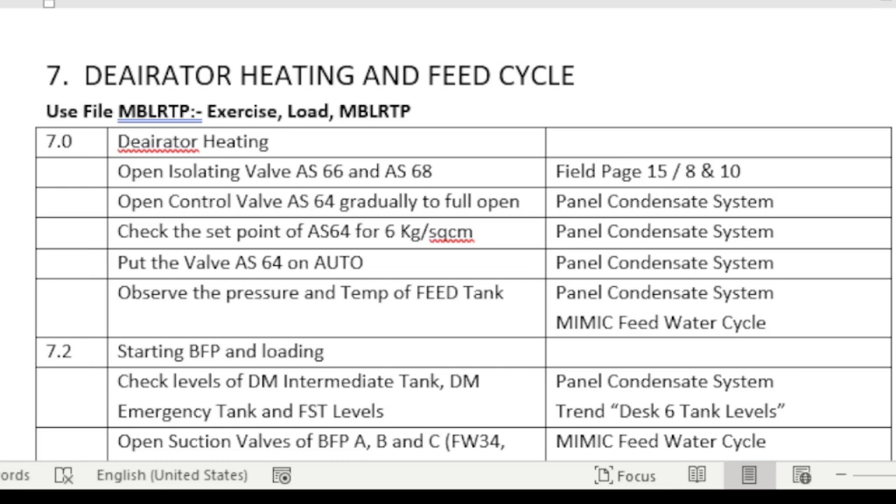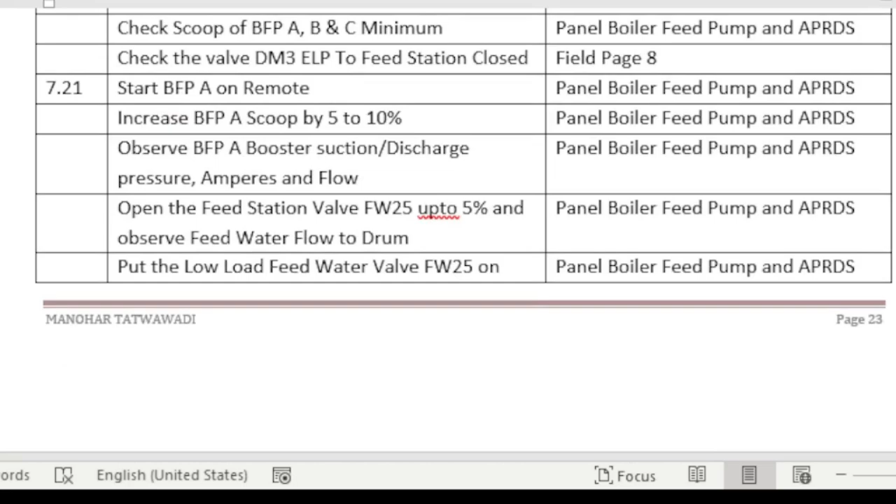Then in this session we will start the BFP and load the BFP. We will start the BFP and load it. So we check up whether the BFPs are on.

Check the levels of DM intermediate tank, DM tank, emergency tank and FST levels. Now you can see these either on the panel condensate system panel, or on the trends - six tanks level in the trends. You can see there also.

Now open the suction valves of BFP A, B and C. BFP A, B and C suction valves can be opened from the Mimic, feed water cycle.

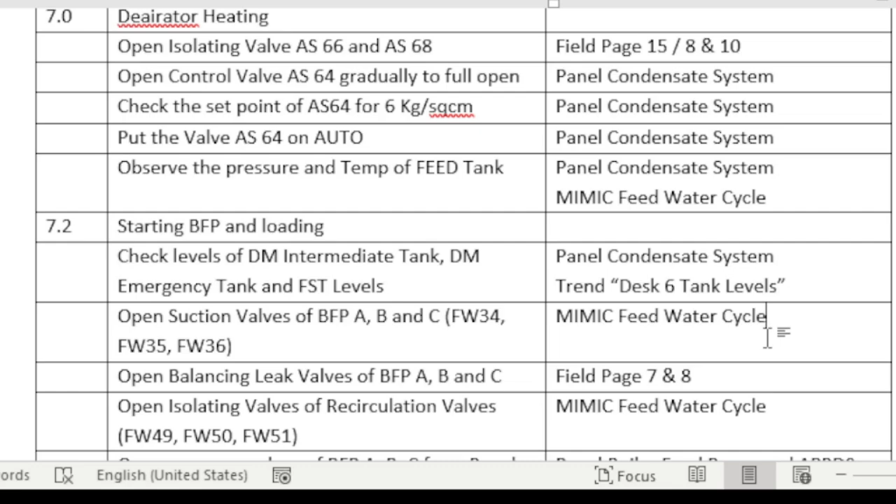Then open the balancing leak-off valves of BFP A, B and C. That is from field page number 7, index number 3 and index number 10, and field page number 8, index number 3.

So you can open the warm-up valves, then open the feed HP heaters feed bypass valve FW24. You can open this from the Mimic feed water cycle. Go to Mimic and open it.

Then select the LRP of auxiliary oil pumps of BFP A, B and C, and also select the LRP of BFP A, B and C on remote. Now these are already made on remote, but you can check it on the IMF instructor malfunction page number 8. There you can find out, but these are already selected on remote.

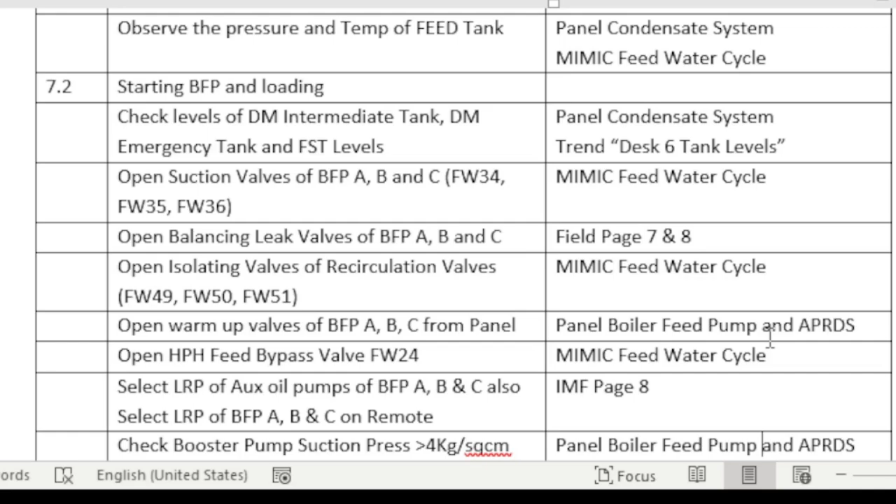Now check the booster pump suction pressure is greater than 4 kg per square centimeter from the boiler feed pump and APRDS panel. Now check one pump, two pump selection on one pump, that is panel feed pump, also on the same panel.

Then standby pump selection on manual. The standby pump should be on manual. So whether it is B or C, if you want to start A pump, then you have to see that the B pump is ready and the selection is on manual.

Now drum level selection - drum level selection high, normal and low - that is on normal, and 1 element and 3 element selection on 1E position.

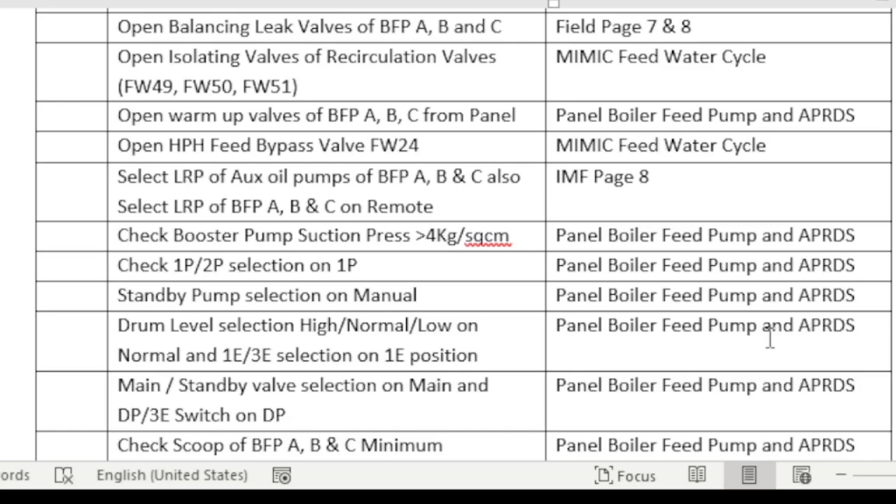Then check up the main standby valve selection on main, and difference DP selection and 3E selection switch on DP, then check the scoop of BFP A, B, C to be on minimum. That is also to be checked from boiler feed pump and APRDS.

The next step is to start the BFP A on remote. Now when you start the BFP A, inform the other control rooms, because it's a 6.6 kV auxiliary and takes the highest starting current, so you have to inform them whether you are starting the BFP.

Now you start the BFP A, B and C from the panel BFP, boiler feed pump and APRDS.

Then increase the BFP scoop by 5 to 10%. It is minimum at 25 or 30, so increase it by 5% or 10%, and check up the flow. That is also on the panel boiler feed pump and APRDS.

Now observe the BFP A booster suction discharge pressure, amperes and flow. Then open the feed station valve FW25 up to 5%, and observe the feed water flow to the boiler drum.

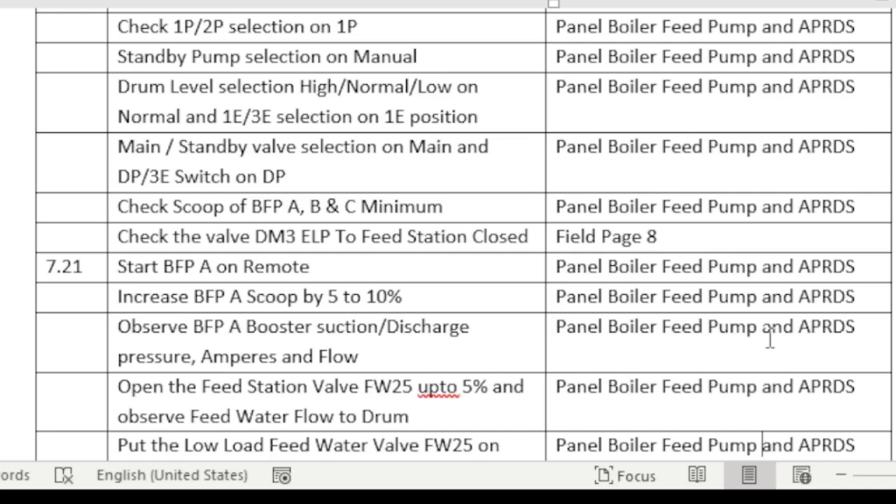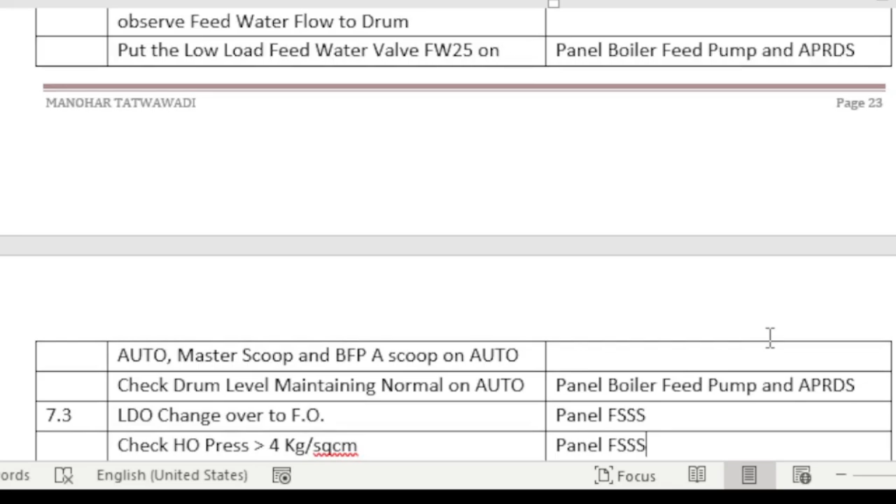Put the low load line feed water valve FW25 on auto, master scoop also on auto, and BFPA scoop also on auto. Now check the drum level is maintaining normal on auto, from boiler feed pump and APRDS.

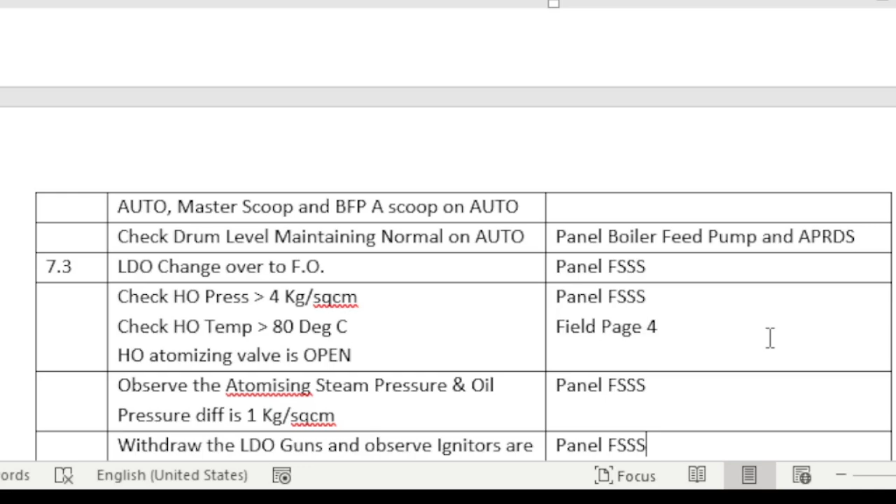Next, in the FSSS panel, we want to change LDO to FO. Go to the FSSS panel, check the feed water pressure, heavy oil pressure more than 4 kg per square centimeter. Check the heavy oil temperature more than 80 degrees centigrade, and heavy oil atomizing valve open. Observe the atomizing steam pressure and oil pressure differential to be 1 kg per square centimeter.

Withdraw the LDO guns and observe that the igniters are in service. Then change over the selection of the warm-up valve to heavy oil and give command to pair AB1 and AB3 guns from the FSSS panel.

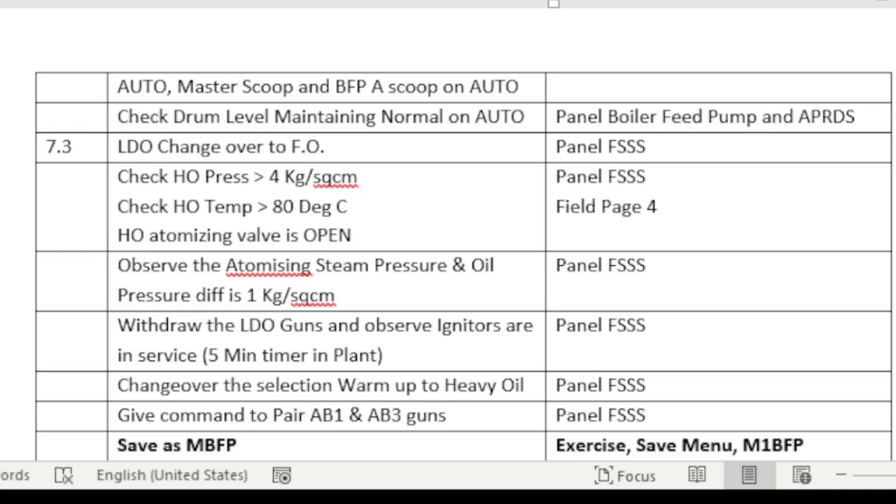Now save the file as MBFP. To save this file, go to exercise, save menu, and number M1BFP. With this we start our simulator session.

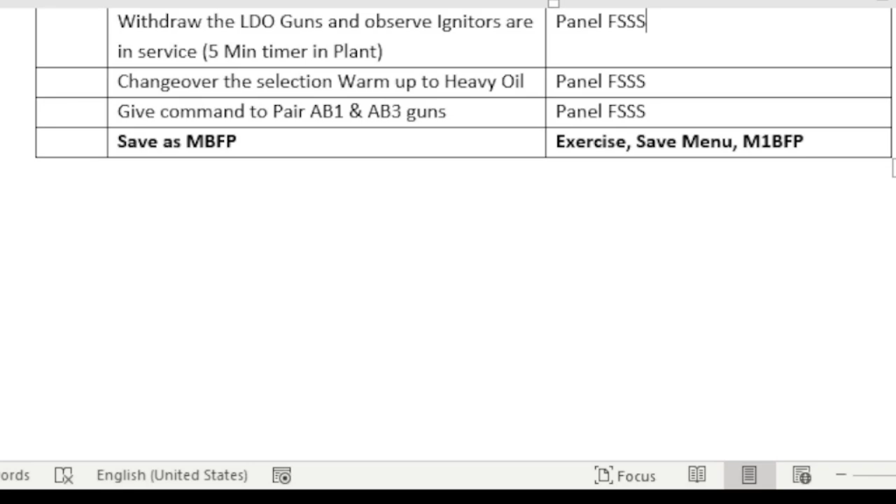This is the sequence of operations after the boiler light up. First of all, we will open the simulator. For that purpose, we will open the server first and then open the actual simulator. Now here we have to load the exercise file.

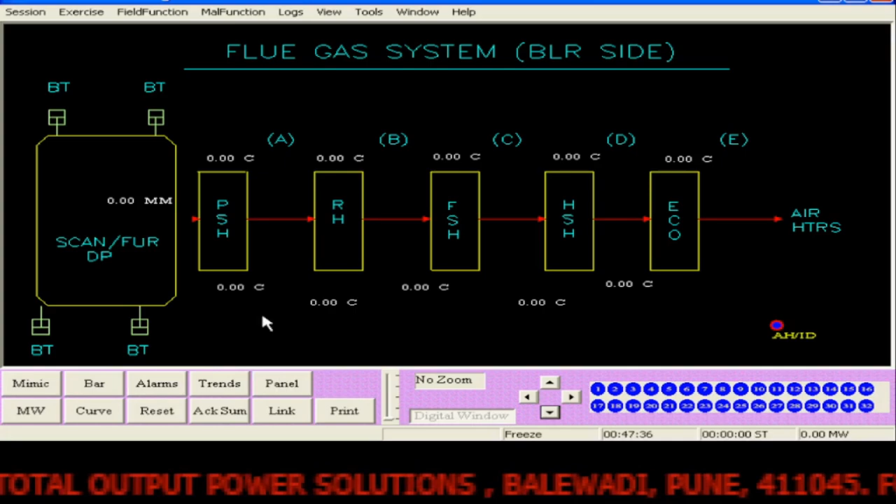We load the file that we have saved with the name MBLRLTP, and now we have opened the file.

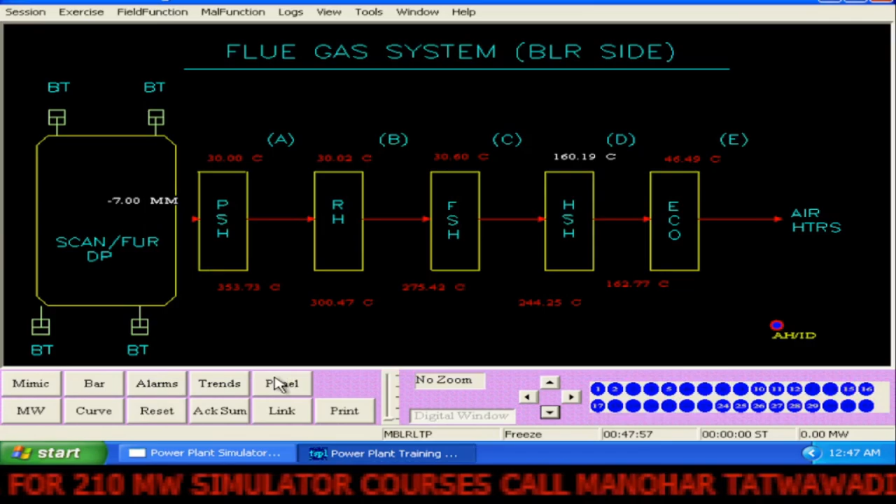Then we have to start with the deaerator heating. We first go to the panel, then we acknowledge, reset, then we proceed for deaerator heating.

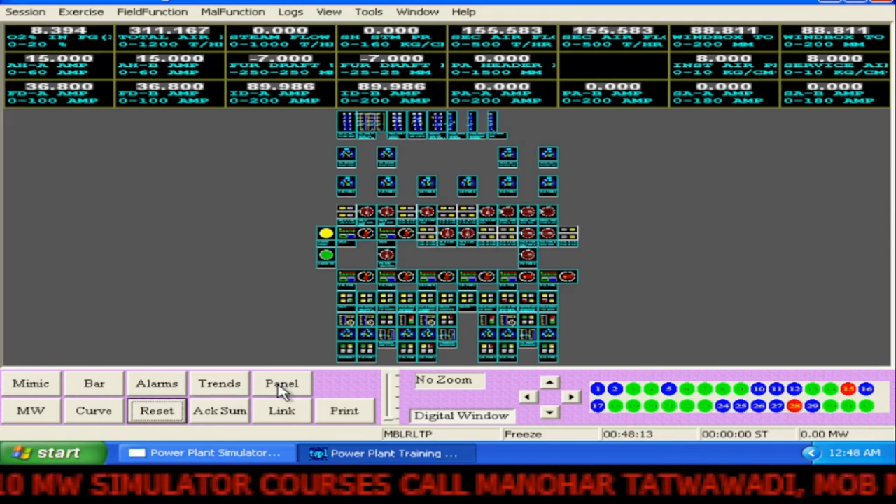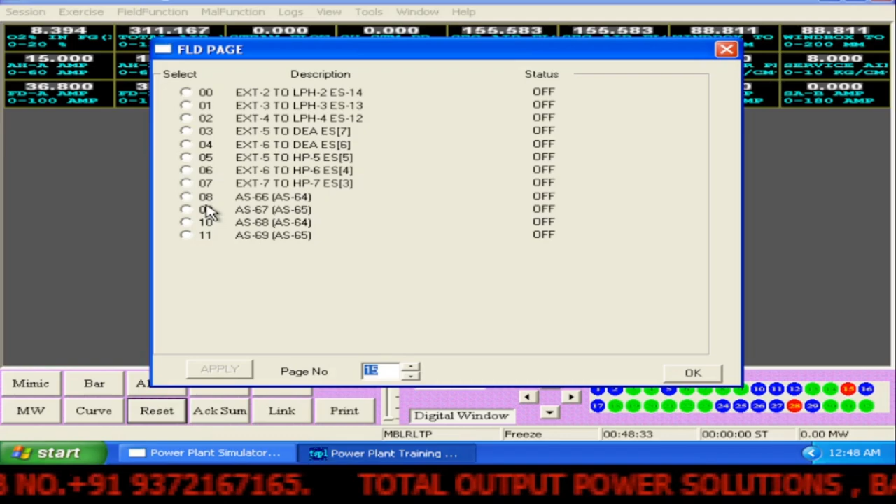Open the isolating valves AS66 and AS68, which are on field page number 15. Go to field page number 15 and there open valves 66 and 68. So this is 66, open, and this 68 valve, you have to open.

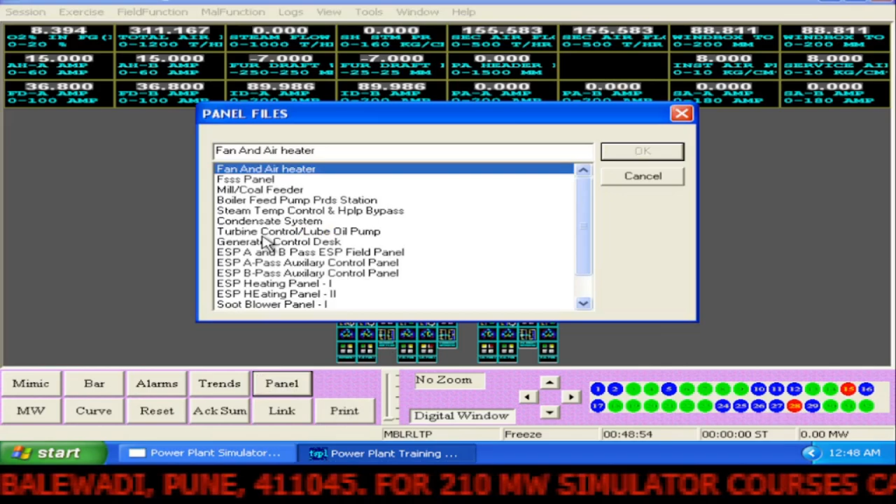Then this valve is open. Then you have to go to control valve AS64 from the panel. We go to the panel, turbine control and condensate system panel. We go to the condensate system panel and from there we open it.

Before doing all these operations you have to run the session. So the session must be in running mode and then you have to operate the valves.

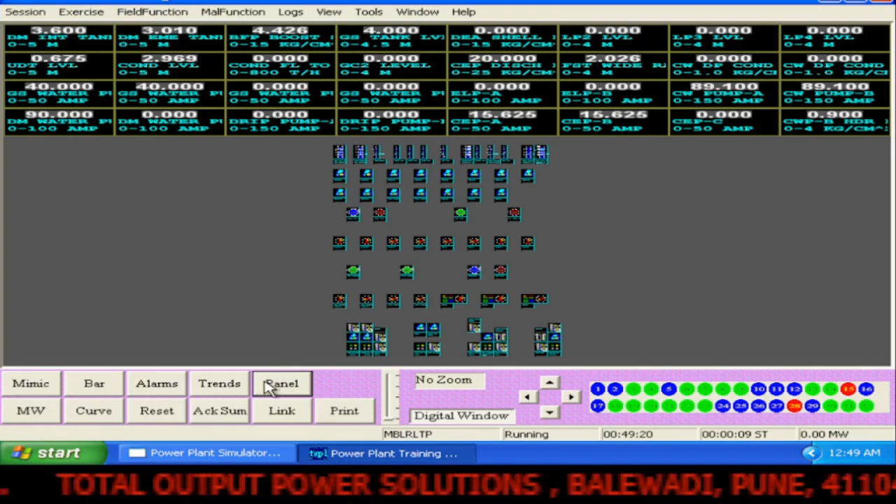Now you have to open the control valve AS64. We go to the condensate panel. There we see where is the AS64 valve. This is the AS64 valve. This is CV6, CV7, and here main condensate.

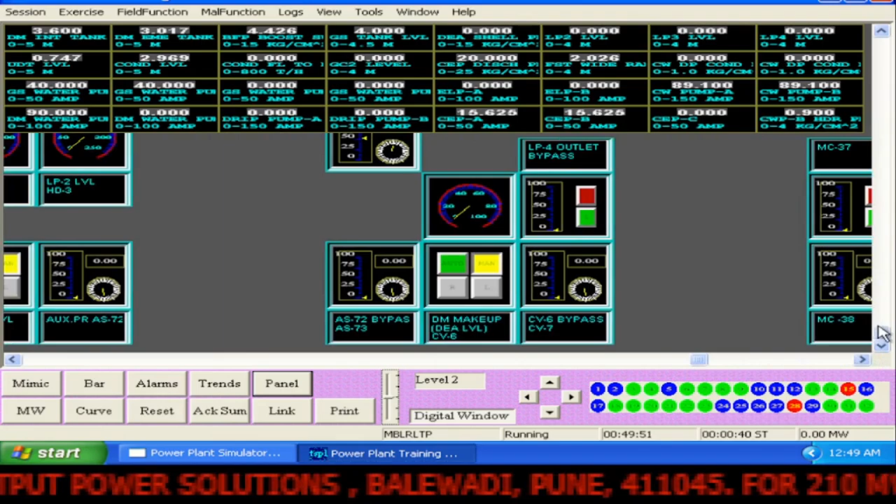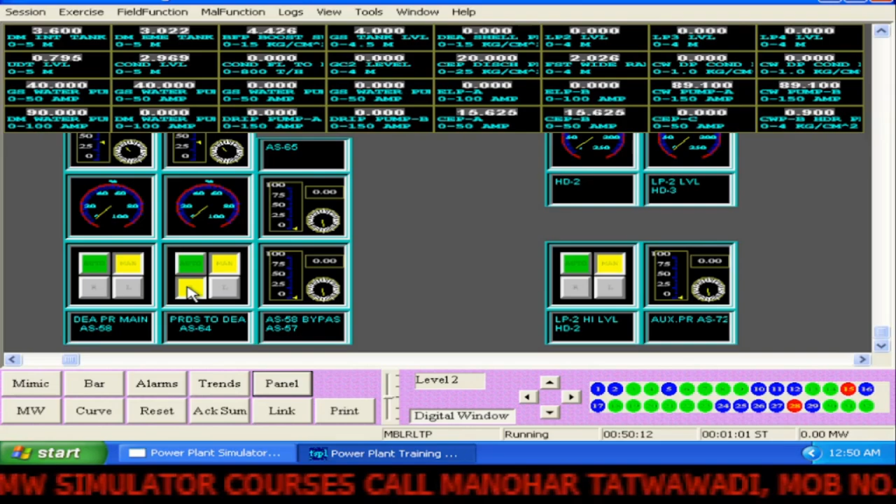Here I think you can see the valve. This is the AS64 valve, and you have to open the AS64 valve gradually. You have to open this valve gradually so that, and open this valve fully.

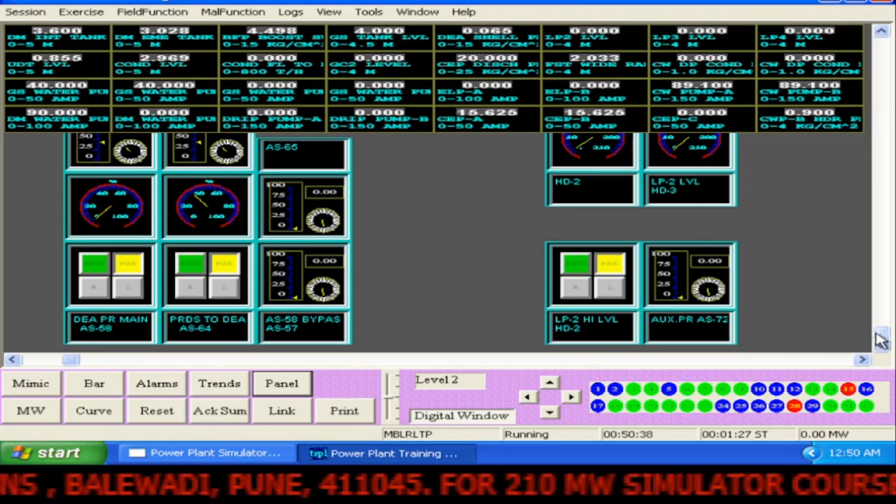So when you open this valve fully, you will see that you have to open this valve fully. Like you open this valve, set the pressure control to 6 kg. If you set this to 6 kg and put this valve on auto, it will open fully. So place this valve on auto so that it opens fully.

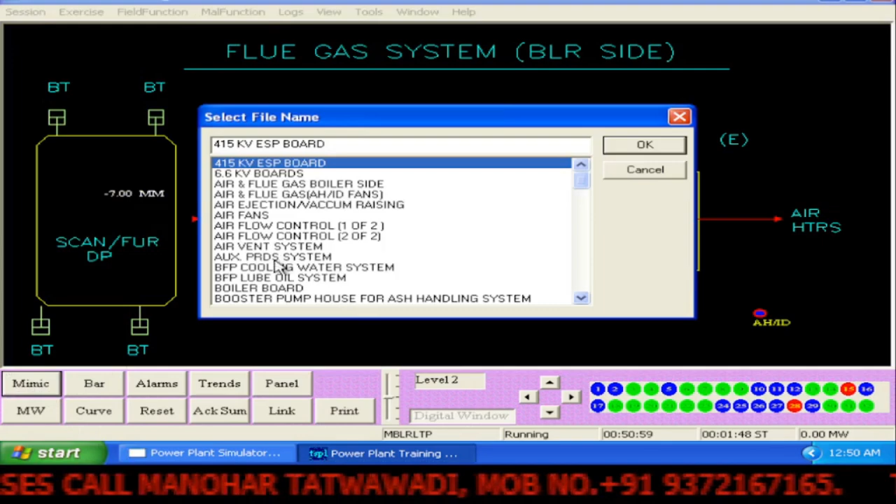Then observe the pressure and temperature of the feed tank. You can observe it here, or you can go to the feed water system, and there you can see the deaerator pressure and the deaerator temperature. You can see this temperature is rising, right?

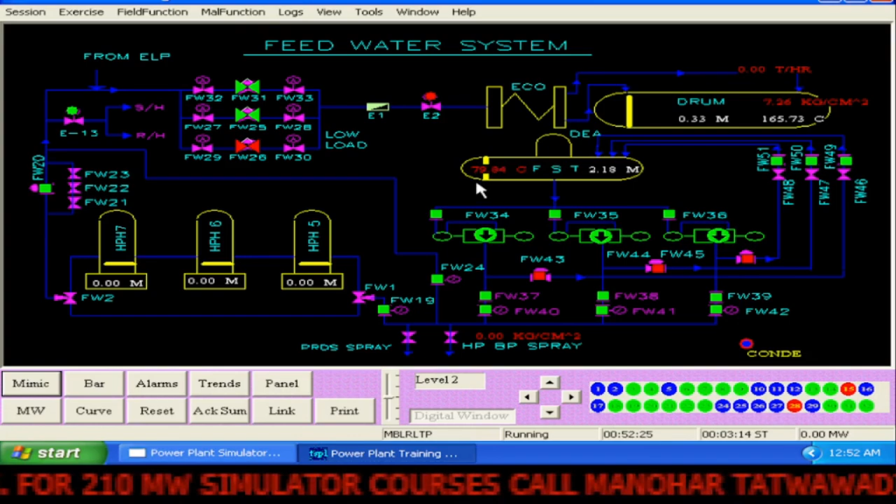So here we pause. Now we see that the temperature has risen to around 80.

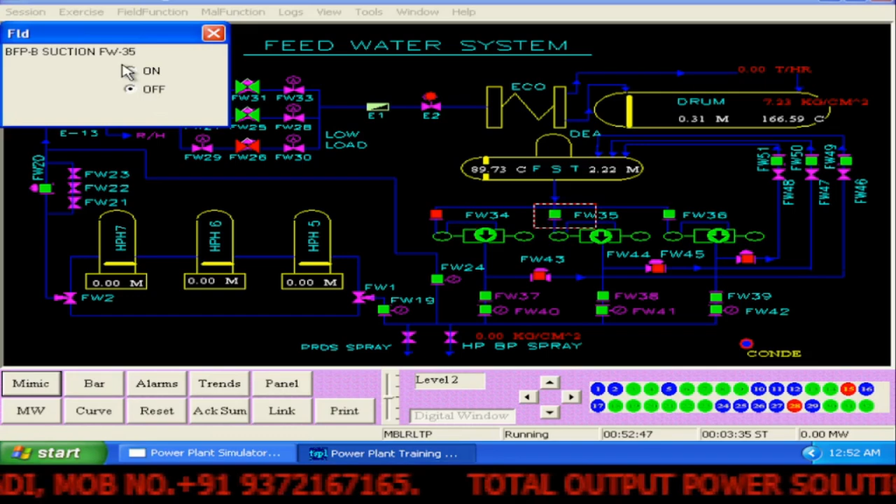Now we start, for starting the BFP, open the suction valves of A, B, C, which are on the mimic. On this mimic, the suction valves of all these pumps you have to open: FW 34, 35 and 36.

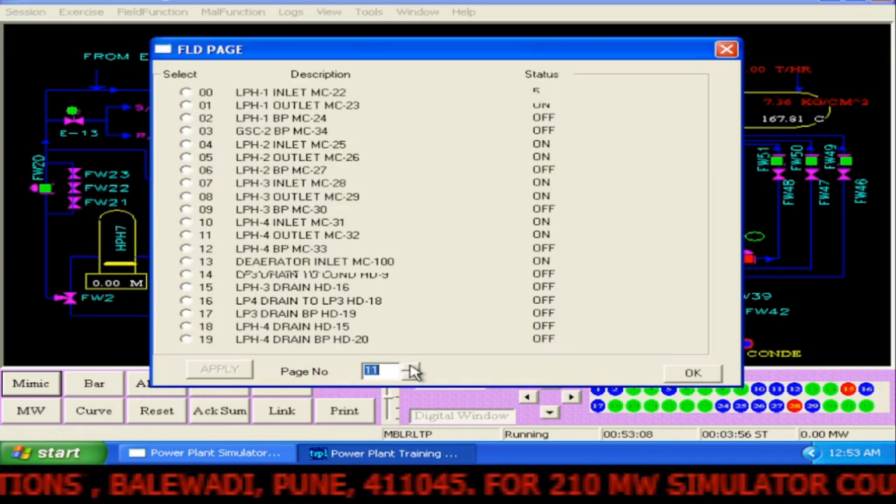When you open these valves, after that go to the field and open the balancing leak-off valve. You have to go to field page 7, and here is the balancing leak-off valve.

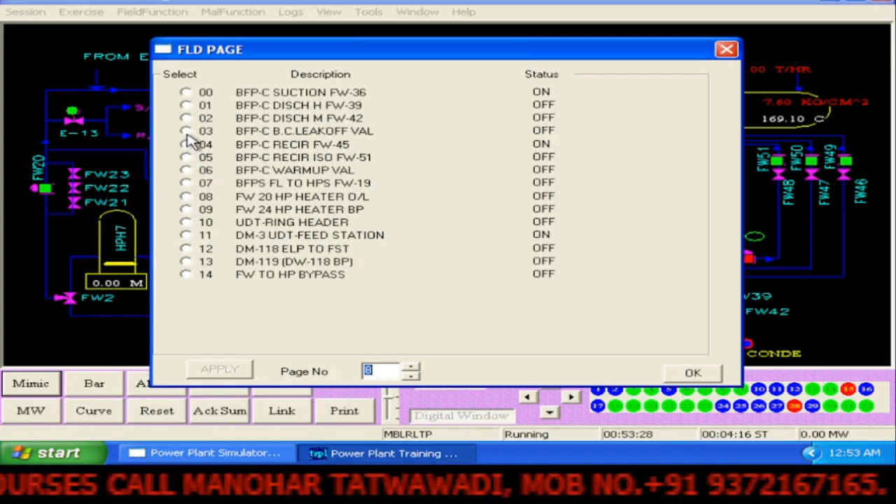BFP A balancing leak-off valve on, similarly BFP B balancing leak-off valve on, and similarly on page 8 you will see balancing leak-off C valve that you have to open. Then open the isolating valves of the recirculation valves.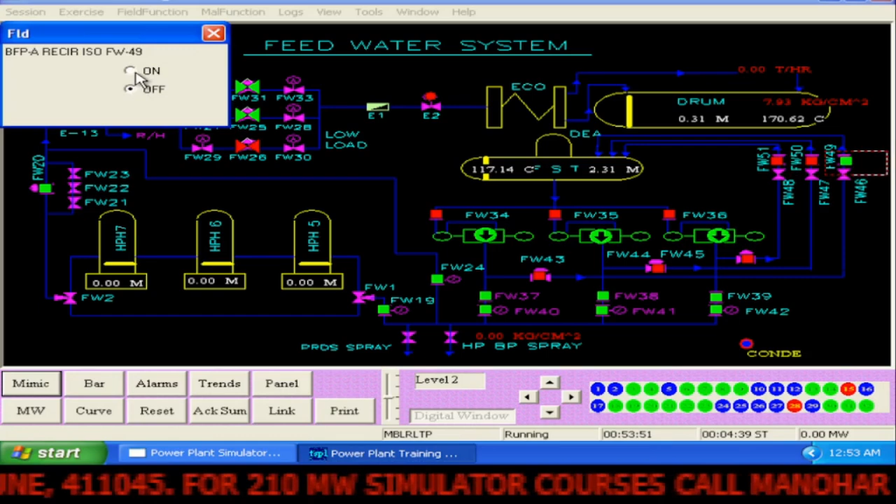These are the recirculation valves and these are the isolating valves. Open these isolating valves from the mimic, for A, B and C. Then open the warm-up valves now from the panel.

We go to the panel: condensate system, boiler feed pump and PRDS station. Here you have the valves here.

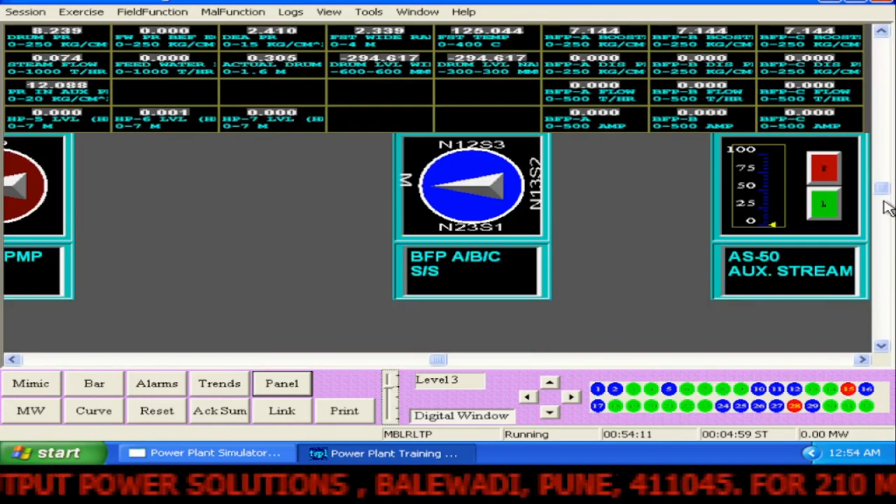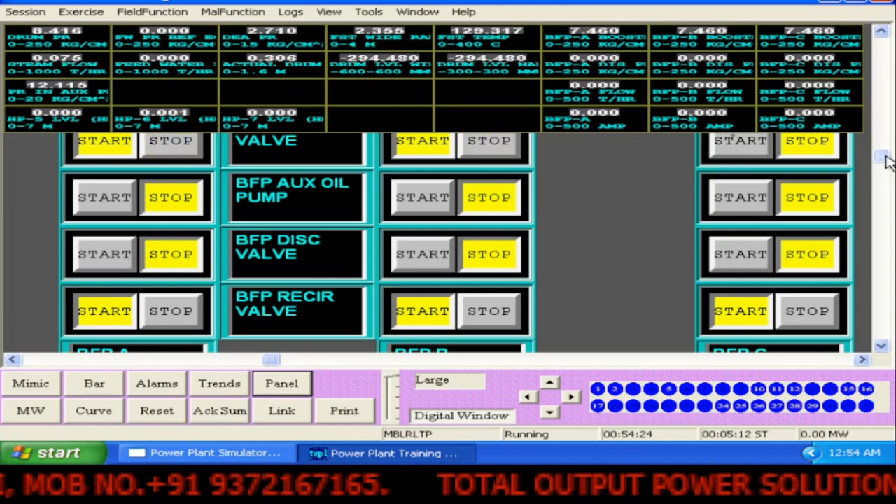Yes, BFP ABC, and here you can go to the BFP, this is BFP C. You can go to BFP ABC. So warm-up valve, this is recirculation valve, this is the warm-up valve. So you open this warm-up valve here, you open this warm-up valve here, and open this warm-up valve here. This is warm-up valve, you can see BFP warm-up valve.

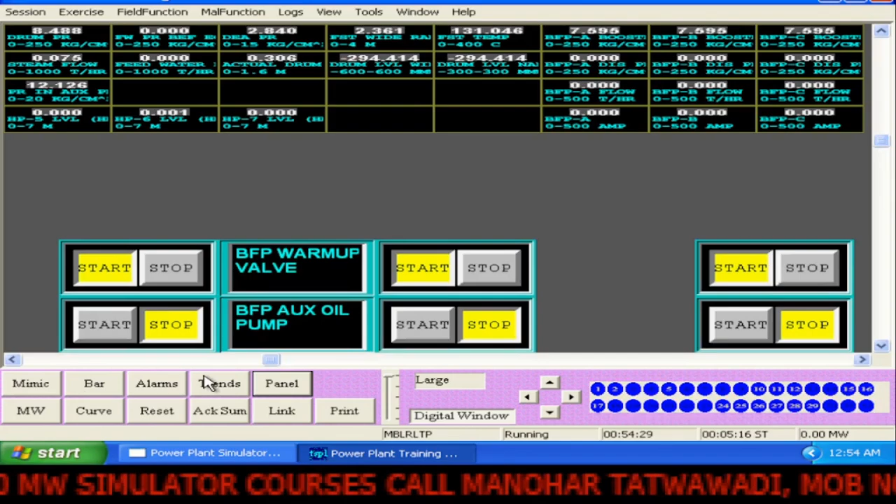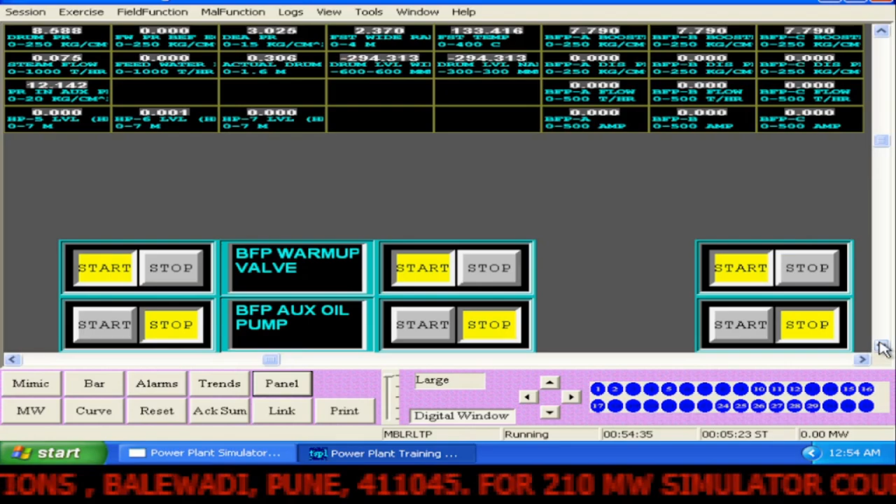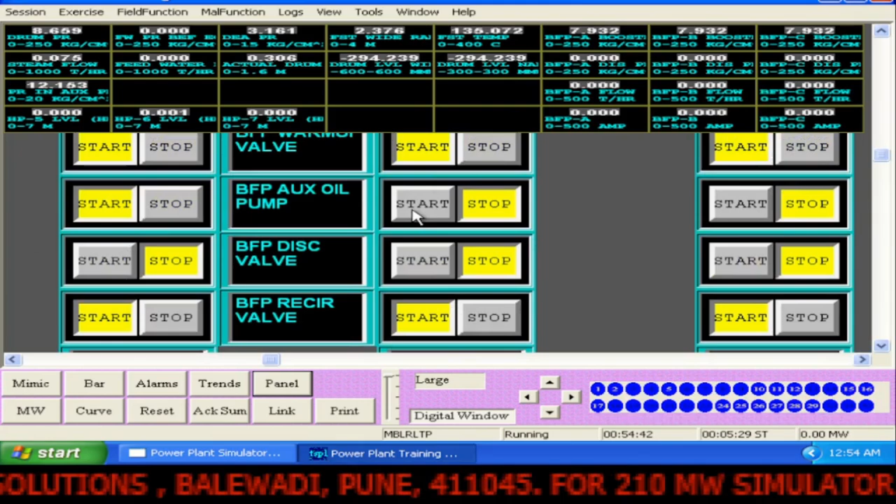So ABC. Then we go to, we check up the LRPs. Those are on remote, and check the booster pump suction pressure, that is 4, that you must check. Then you can start the auxiliary oil pumps here. From here you can start the auxiliary oil pumps. You start the auxiliary oil pump, and you can start this auxiliary oil pump.

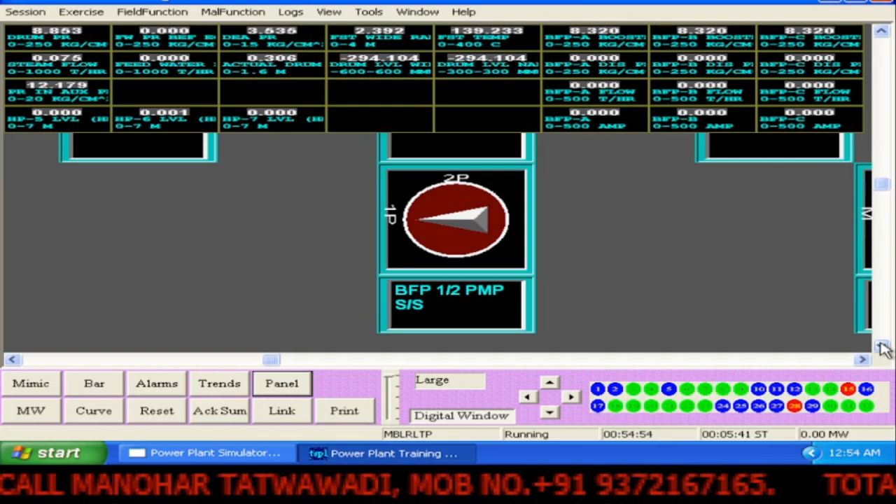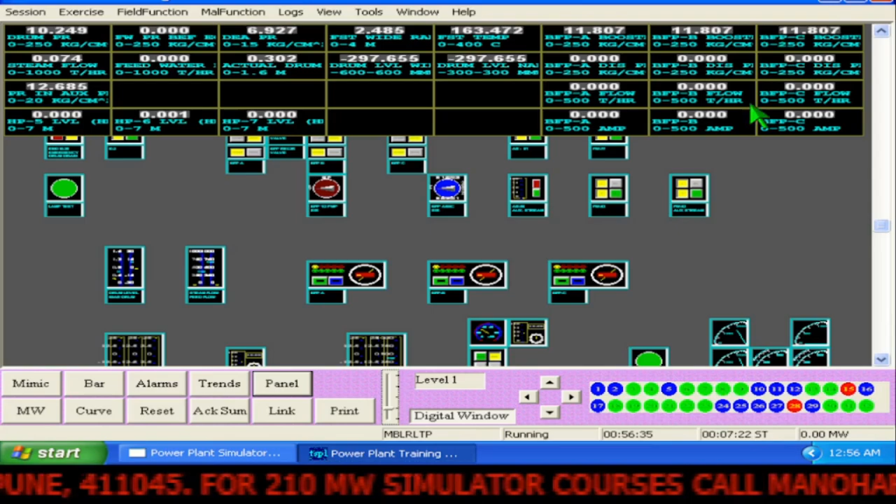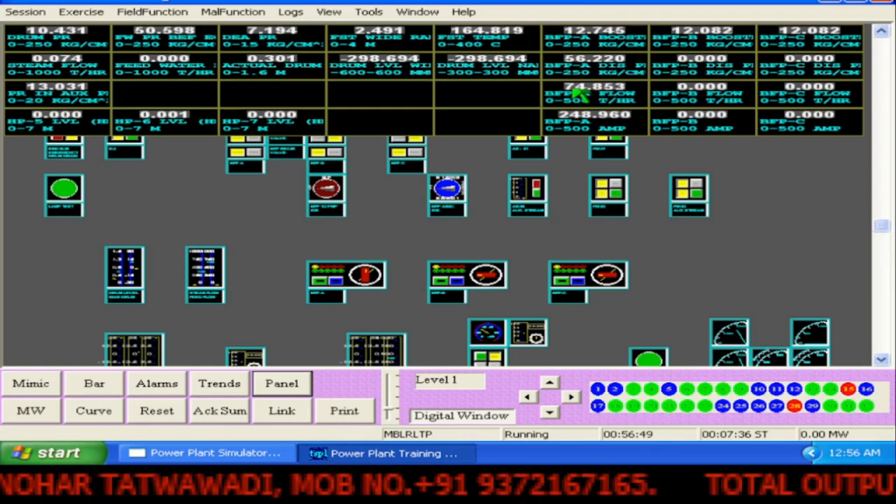So here is, I think, 3 BFPs. You can see here the 3 BFPs, the controls. You can see here the pre-check also available. So you can start the first BFP. Now when you start the first BFP, you can reset the things. You will see the amperes there, BFP A, and the BFP A flow is also there, BFP A, and the scoop control is on minimum.

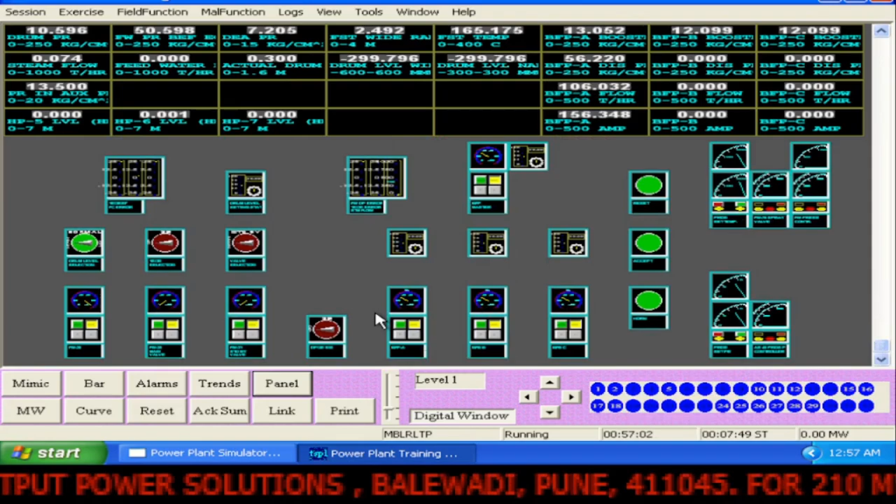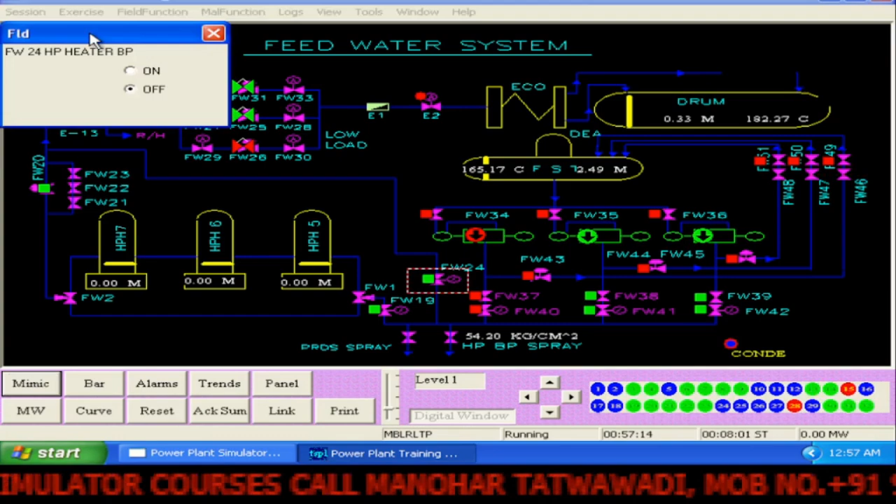So the scoop control we will check up, it is on minimum. We will just raise this scoop control. Now we go to the mimic and open the valves for this FW24, we make this valve on, and now you will see that this valve is on. Then from here this E2 is also on, so some flow will be there, which is this 86, indicated here, 86.60 tons, and this much flow is there.

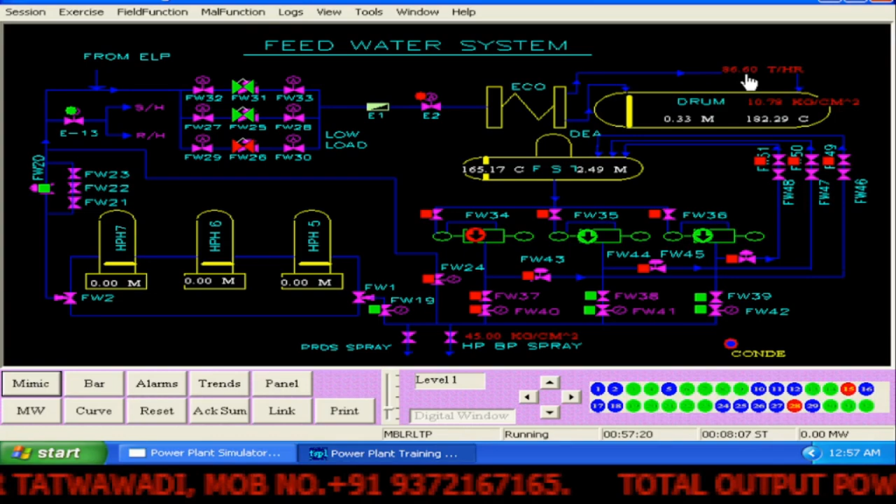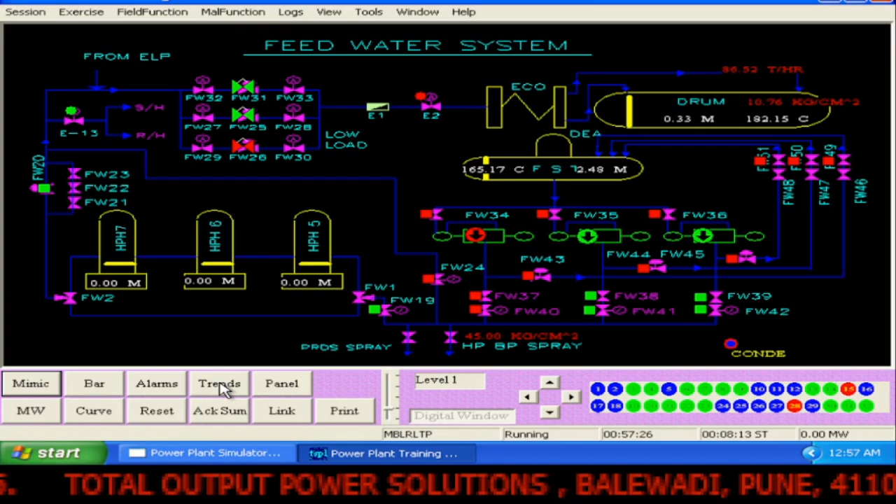So BFP is now started and it is delivering water to the boiler drum. The drum level we can check, it will be now increasing in the trends. You can go to trends and you can check up the drum level. You see it has started little bit increasing. So this drum level will now increase. We can again increase the feed water flow.

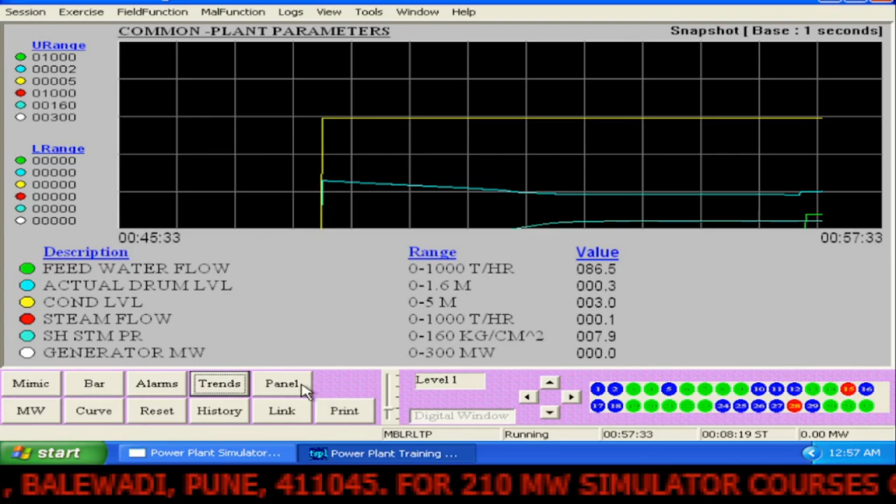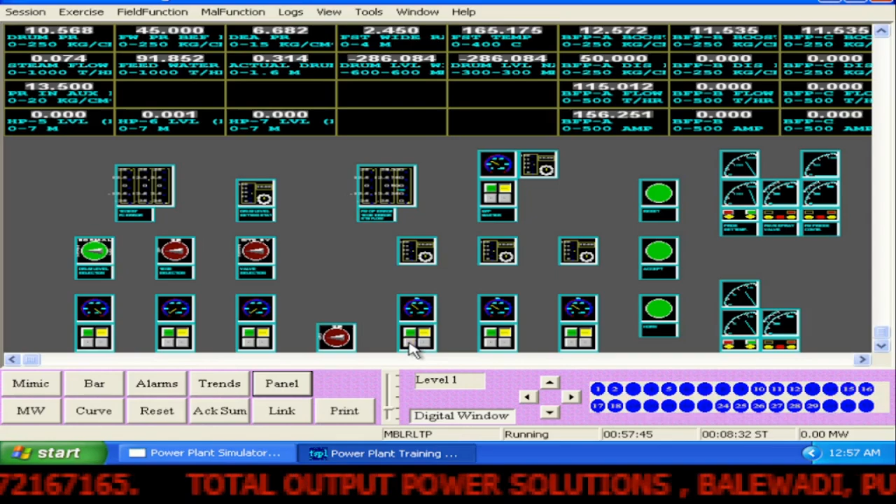So we go to the panel and from here we raise the BFP A, slightly we raise the flow. Here you can see the flow, feed water flow, it is 86.5 something tons. So we again slightly raise it. So you will see that it has increased. And well friends, now we have to change from LDO to HFO.

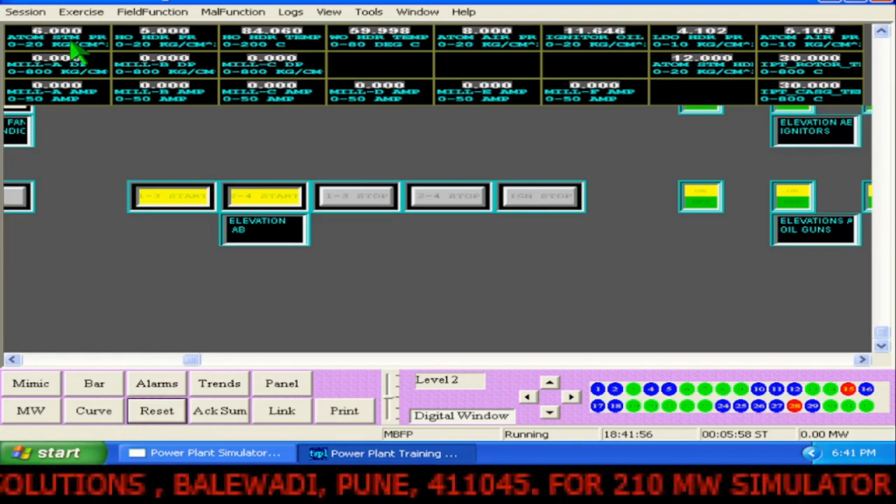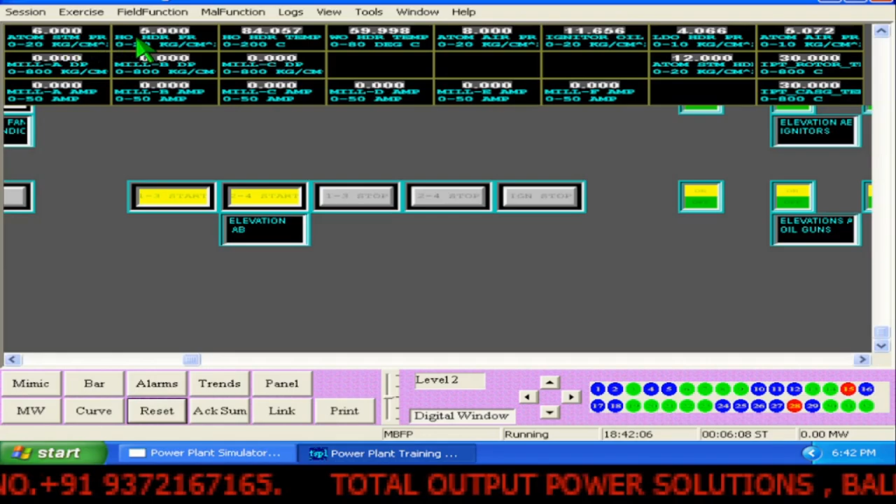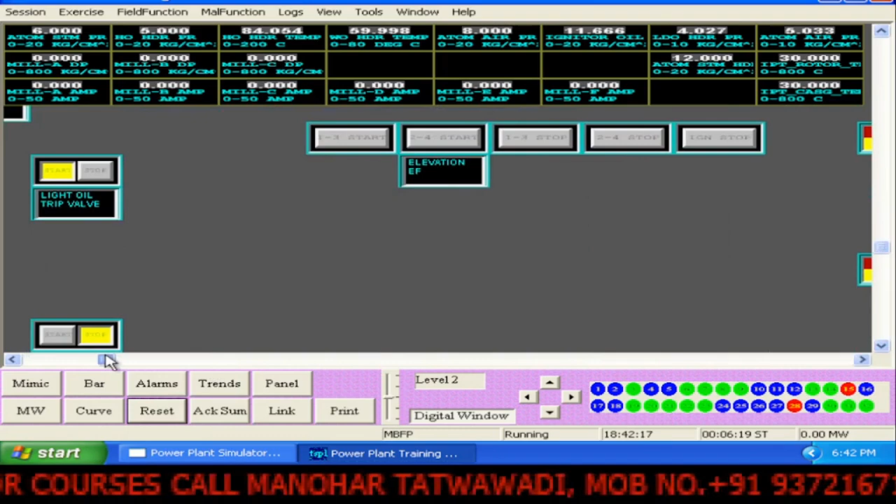So for this we check the HO pressure, this heavy oil header pressure, which is 5. Then check the temperature also, it is 84 degrees centigrade, more than 80, and atomizing valve is also open. Now the atomizing pressure difference, atomizing steam pressure, there is a difference of 1 kg. Then we will withdraw the LDO guns, but before that we need to open the HO heavy oil valve, heavy oil trip valve. Which is closed. You see this is the heavy oil trip valve.

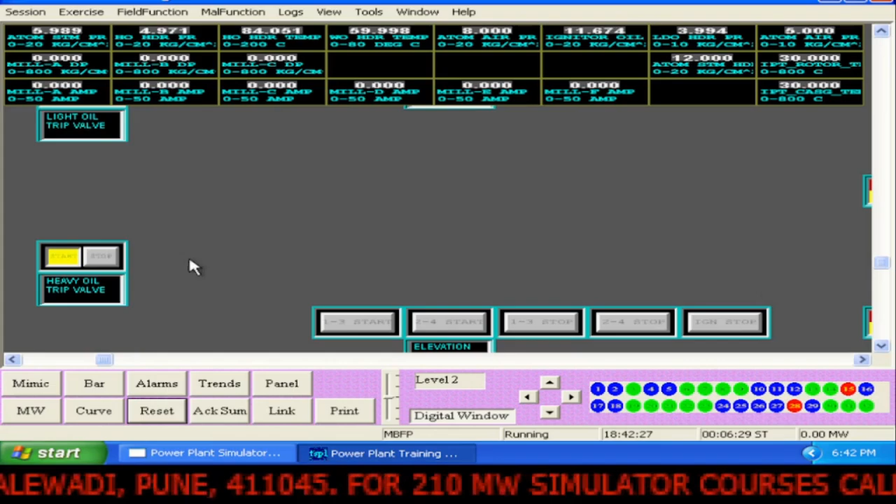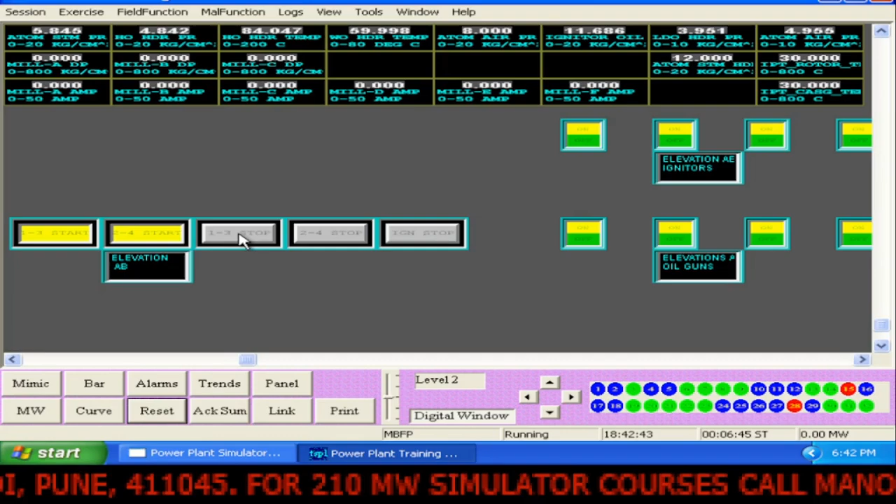We will open the heavy oil trip valve, and now once we open the heavy oil trip valve, we will stop the LDO guns. So these are the LDO guns, every elevation we have here. So we give stop command to LDO guns, pair 1-3 stop, and we see that the 1-3 has stopped. Similarly pair 2-4 also we will stop. So now there are no oil guns in AB.

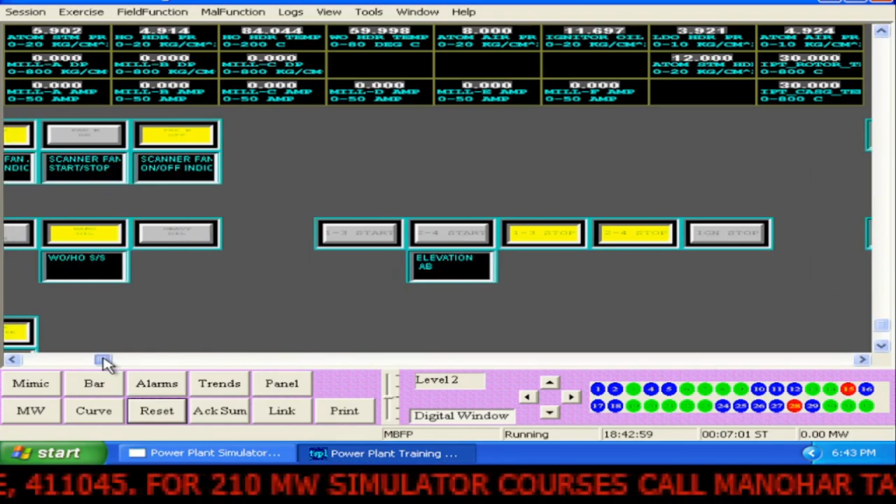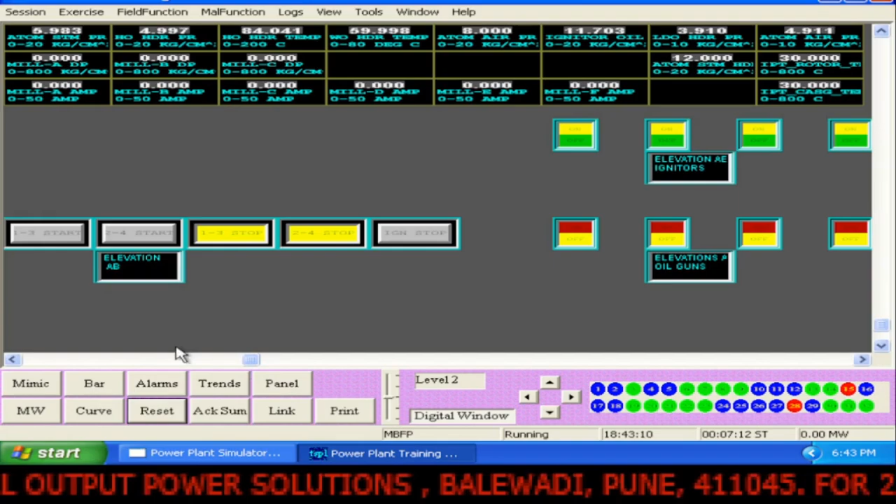Now we take the selection on heavy oil. So we make the selection on heavy oil, and then we give start command to pair 1-3, and you will see that pair 1-3 will be started with heavy oil. Similarly pair 2-4 also we give a start command.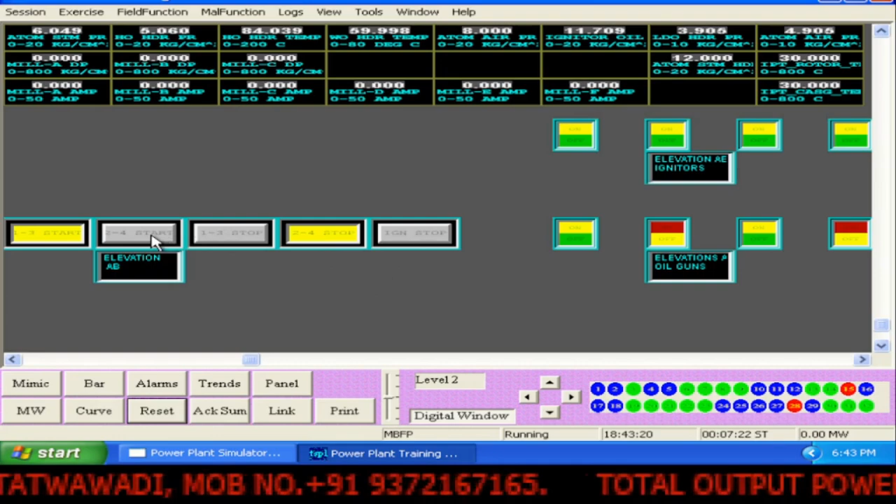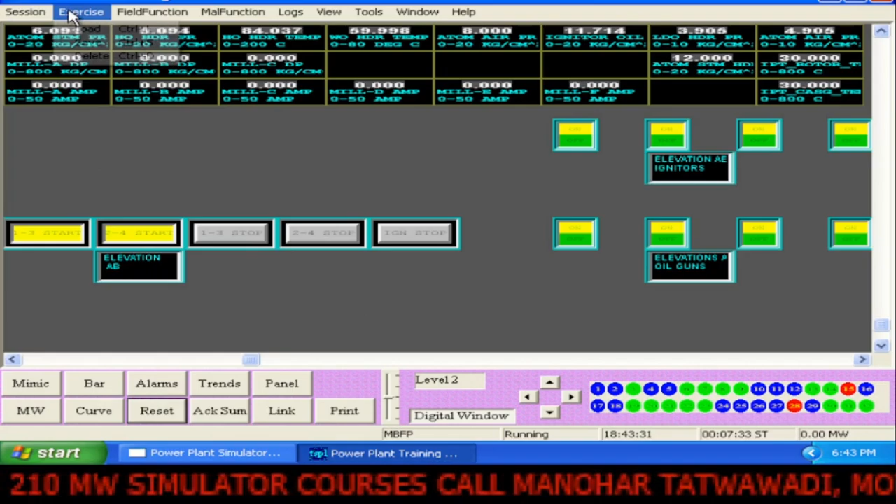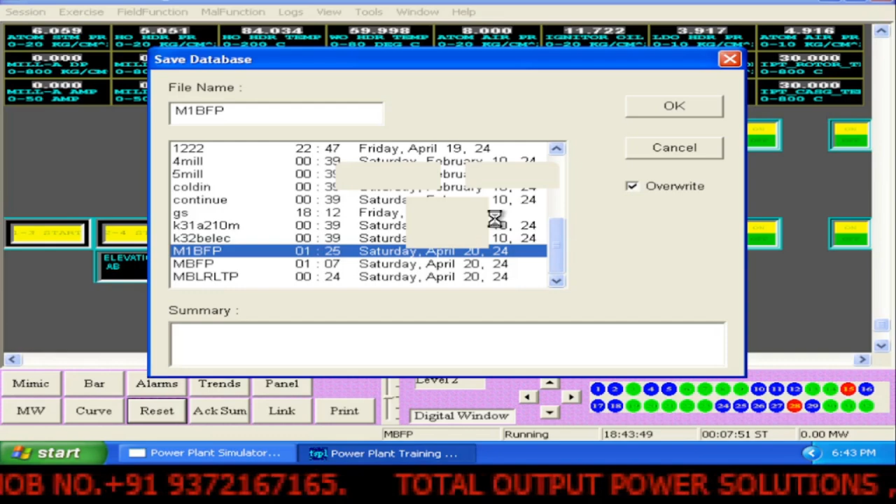So this is the changeover done, and now we will save this file exercise, and we will save this file as M1 BFP. So that is all for the 7th chapter. We will continue with the next chapter in our next video.